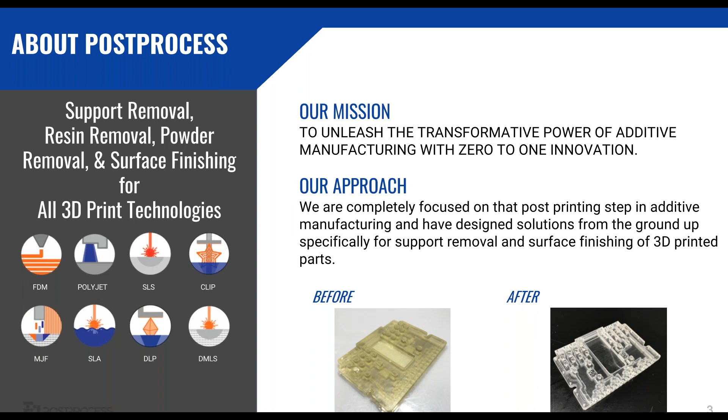So of course, when I talk about post-process, and that's our sole focus, kind of the next question I get with potential companies is, why is there a need for a company like post-process? Why is there a need for someone who's solely focused on that post-printing step? And the reason is, and I'm sure many of you are aware of this, and anyone who's been in the additive landscape for really any amount of time knows, when you look at the steps involved in printing, which is the design step, the build step, and the post-print step, the post-print step really has been one of the most neglected aspects of that equation.

So if you're looking at the design side with software like SolidWorks, then you go to the print side where you're printing with something from Stratasys like PolyJet or FDM. Those technologies are constantly being updated. You're constantly getting software updates. The printers are constantly being able to print new materials, print faster, those types of things. And then when you look at the post-print step, people are either using, or the printer companies are recommending, the same solution that they've been recommending literally for decades.

And more often than not, that solution wasn't designed for additive. It's something that's come from traditional manufacturing that kind of works at removing supports. So people have brought it over to additive. So it's not optimized to the process. And it's created one of the biggest issues of today, which is that bottleneck of the post-printing step, right?

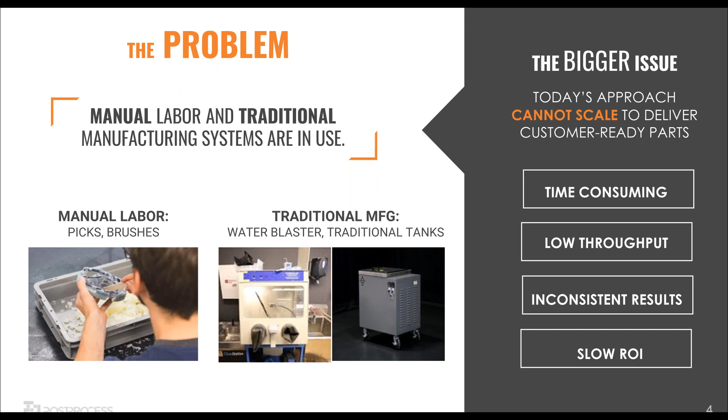I see that as no more true than with PolyJet itself. As you look at PolyJet support removal, there are really two methods that the printer companies recommend, and really only two methods that companies are using. The first, probably the most popular, is water jetting.

If any of you here are removing supports with PolyJet, you probably have one of these at your facility. But if you're not familiar with water jet, it wasn't designed to remove PolyJet support material. It comes directly over from traditional manufacturing for tool cleaning applications on metal tools. You have glove ports you stick your hands into. With one hand you're holding a nozzle like a pressure washer, and with the other you're holding the PolyJet part, just blowing support material off as best you can.

In fact, most models have a little windshield wiper on the front because water's getting sprayed up and splashing around, going back and forth so you can see and get in there. Really just not a great solution, right? But it's the solution that's been recommended ever since PolyJet has been around, and there's been really no advancement in that technology.

When you look at it, it's non-specific to additive, so you typically have a lot of challenges associated with it. Long, unpredictable cycle times. Every part tends to be a little different in the water jet. If it's small with no internal geometries, it might only take a minute or two to clean. But if it has any internal geometry, you're looking at maybe 20 minutes, maybe 2 hours. I've even seen a part that took 8 hours to clean because of the internal geometries. So very unpredictable.

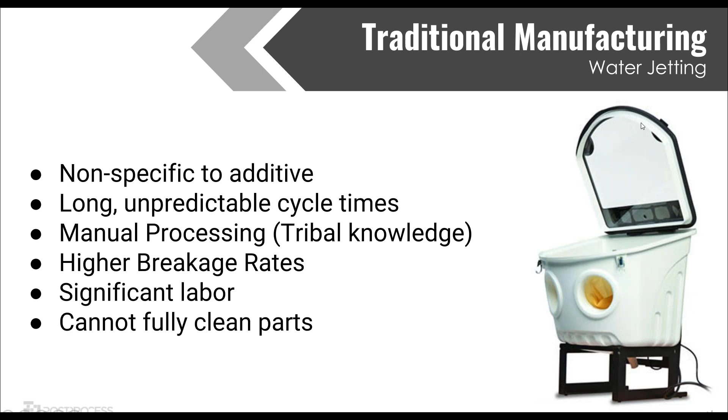I've heard it called a couple different things, maybe that hybrid layer—it's just that partially cured resin layer on the part that doesn't come off no matter how much you water jet it. It just seems to always be there. So that's what I traditionally see out of water jetting. The other method that's pretty common, and usually goes hand in hand, is just straight manual labor: picks, brushes, dental tools.

I usually see a mix of this and water jetting. I've run into some instances where, because of facilities requirements, they couldn't use a water jet, so they're doing everything by hand with dental tools and things of that nature. Very similar challenges as the water jet, but probably even more so - higher breakage rates, especially on thin wall parts, and inconsistent results, probably even more so with this method.

If you have 100 of the exact same PolyJet part and they all go through the exact same technician for cleaning by hand, you'll end up with 100 different parts by the end of the process. That's the nature of manual work - there's going to be support material left on one part that wasn't left on another. It's also very time consuming, probably even more so than water jetting, so a lot of time is tied up trying to clean these PolyJet parts.

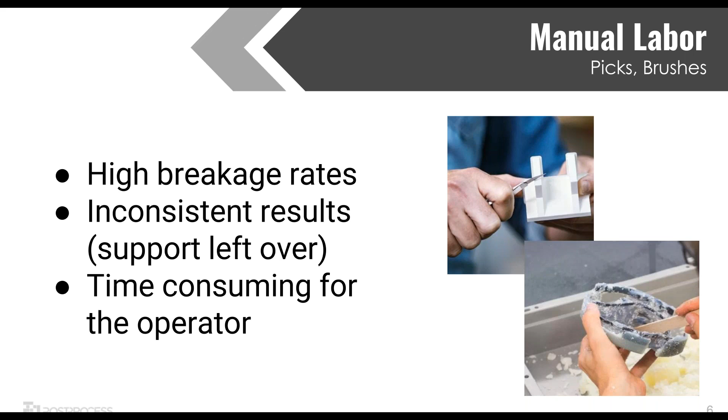These methods and challenges in the PolyJet support removal process are really what our founder at PostProcess saw and looked to address with our solutions. We've developed automated and intelligent solutions for PolyJet support removal, and to do that, our machines are made up of three core components: software, hardware, and chemistry. That's what makes us different from others - we're designing each section from the ground up specifically for additive manufacturing.

When I say hardware, here's a quick look at the support removal solutions PostProcess offers. There are a couple different technologies, whether it's a submersion system or a spray. Each of these machines can do any of the support removal processes shown in the top right - your FDM, SLA, PolyJet, CLIP, or DLP. Oftentimes it's a different detergent, but it's the same machine.

We'll talk about PolyJet today, and I'll specifically be talking about the submerged system, the DEMI and the FORTI. Those lend themselves really well to addressing those big PolyJet challenges we just discussed. The DECI and BASE also do PolyJet, but for the sake of today's timing, we'll just focus on the submerged system.

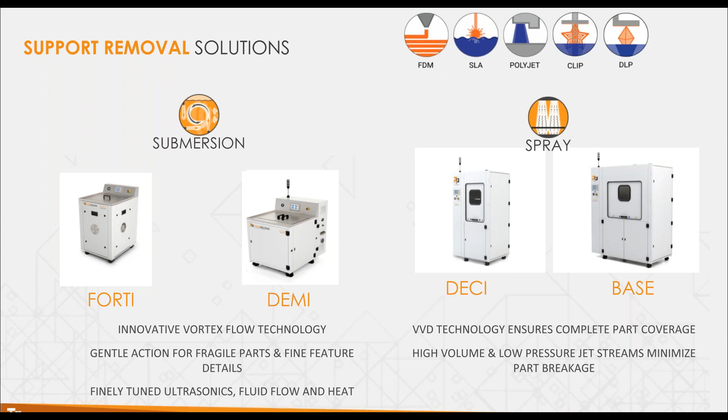Take a look at the FORTI and DEMI here - this is the hardware behind the solution. If you cut the DEMI and FORTI right in half, this is what you'd see: a tank filled with detergent, with strategically placed pumps that take your part and float it through the submerged tank. You've got ultrasonics on the right providing mechanical agitation to break up support, and also a heating and cooling system.

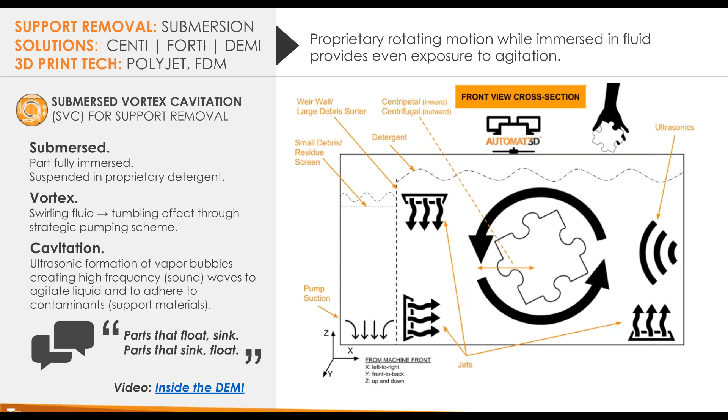This is conducive and designed specifically for additive. There are different methods here to take away the need for manual picking or manual water jetting - that's where the temperature, ultrasonics, and pump come in. Once you put the part in there, they're doing the manual work to remove those supports. That's the hardware aspect of the solution.

Next is the chemistry, the detergent - very different from what you see today. More often than not, customers looking at different chemistries to remove supports are looking at what already exists on the market and trying to see what works for additive parts. At PostProcess, our whole focus is 3D printing. We have in-house chemical engineers studying the support materials out there - the 705s, 706, 707s, and FDM soluble supports - and developing a detergent specifically to remove those supports. That's why we have special detergents for each print technology.

We have a detergent called PG1 that's specific to removing supports off 705, 706, 706B, and 707. This is what really helps optimize the solution - you have the hardware taking away manual labor with the ultrasonics, the heat, and the pump, so someone doesn't have to manually pick away at parts. Then the detergent is in there eating away at the support material like it was designed to, but not touching your part material.

That's one of the biggest reasons why when you pull a part out of our solution, it doesn't have that tacky hybrid layer you often feel when water jetting. When water jetting or picking, you're relying on manual force to remove support material, so there always seems to be some left behind. But when you combine mechanical force with chemistry like our PG1, that chemistry eats away at the support material so it's non-existent on the part - you're really just feeling the part material itself.

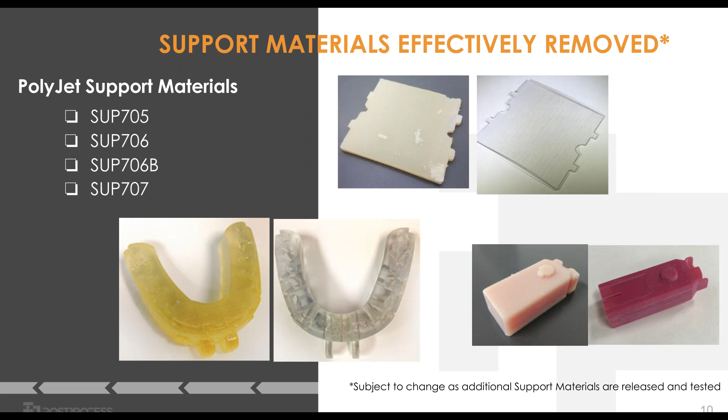And then the last thing I'll talk about for our solution is the software. So if you recall, we talked about the hardware, the chemistry, and now the software. The software is really what ties everything together. This is how we get our automated and intelligent solution.

When I say intelligent solution, the software really is taking care of a lot of the background changes and variables. So when an operator comes up, there's typically just 2 or 3 settings he hits to adjust, and then he hits play and he can walk away. You don't need that skilled technician, you don't need that guy with the tribal knowledge to run parts. With some just very basic training, you can come up and start a cycle within just a few seconds.

In addition to being easy to use with those 2 or 3 adjustments and variables, you also have the ability to save and store recipes. So now it could be someone's first day on the job and you just tell him to go run recipe part 506 or whatever you've named it. He can go up and with one click of the button, he's getting the same consistent support removal of the PolyJet part as the guy who's been there for 15 years running the equipment. It's all because the software has this control to save and store recipes.

And then the other big thing about the software is the control over the different variables of the hardware. So when I talked about the submerged system, the DEMI and the Forte, I said it had ultrasonics, a heating and cooling system, and a pump. The software really gives you some minute control over that. You can control the ultrasonics from 0 to 100%. You can control the heat to plus or minus a degree Fahrenheit. You can control the pump on and off. That is what allows you to process very thin wall parts without breakages and things like that.

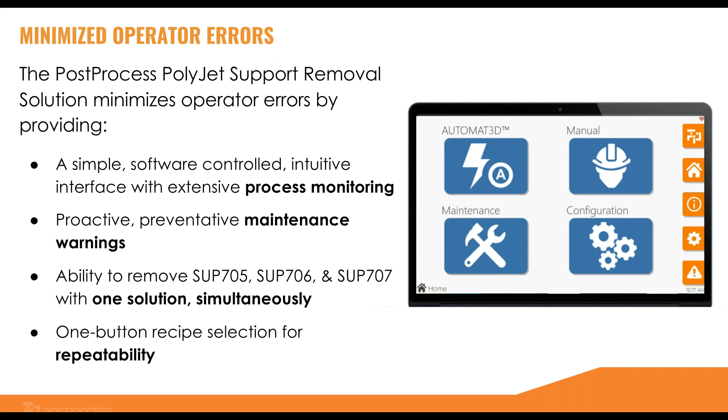So I just want to give you a couple more quick examples so you can see our solution works really well, whether you're doing 705 or 706 supports. You can see a couple of examples up there. Works well if you have internal or external geometries. Again, you're just using that chemistry to eat away at the support material, using that software to control the hardware. So if it's a real thin wall part, like the bottom right part you see there, you can dial things down so you're not going to get warping or damage. And at the same time, if you have a more robust part, like that one in the top left corner with a lot of support material on it, you can dial up temperature, dial up ultrasonics, and fully remove those supports.

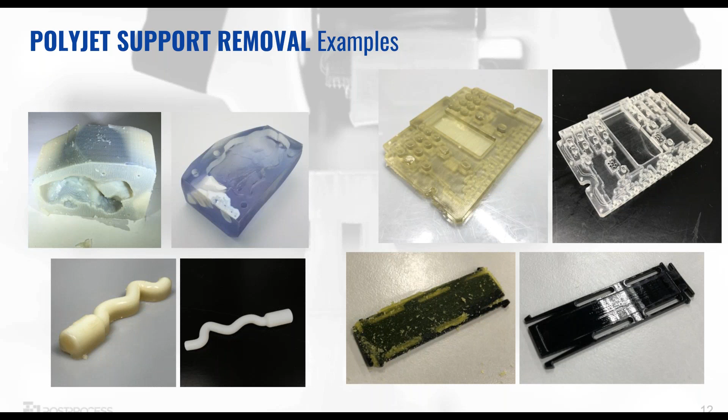And you're also getting a cleaner part by the end of it. When you're water jetting, when you're picking, you got that hybrid, that tacky, that waxy layer left over. Not the same when you go through post-process, because you have that detergent that's specifically eating away at the support material, but not at the part material.

The next one is advanced process control. That's just the software controlling the hardware and gives you the flexibility of running those fragile, unique, organic geometries without having breakages. But at the same time, you can dial things up like the ultrasonics and heat when you have a more robust part, and you can get quicker cycle times. And then, of course, minimize operator errors. It's just kind of the nature of automating the process.

Once you have saved and stored a recipe, you're doing the same exact sequence of events over and over again. So once it's dialed in, you're not damaging any parts. There's no need for operator error because he's not touching anything. But of course, if you're water jetting or picking, it's just a different action every single time on the part.

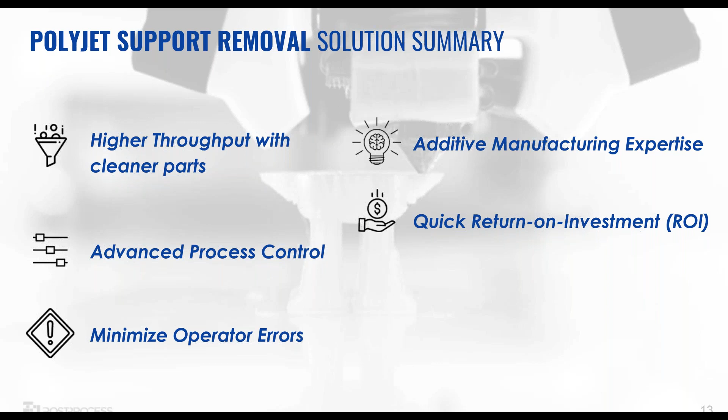So I'm going to go through a couple of real life case studies that we've done with post-process with some customers. Hopefully I kind of gave you an idea of some of the bigger challenges that people are seeing when they're water jetting and picking. I'm sure if you guys are using PolyJet, you're very familiar with those. And hopefully you got a better sense of what kind of automated intelligent solution this looks like from post-process. So these case studies are from real life customers that are switching from those traditional methods to post-process and how it's changed their lab.

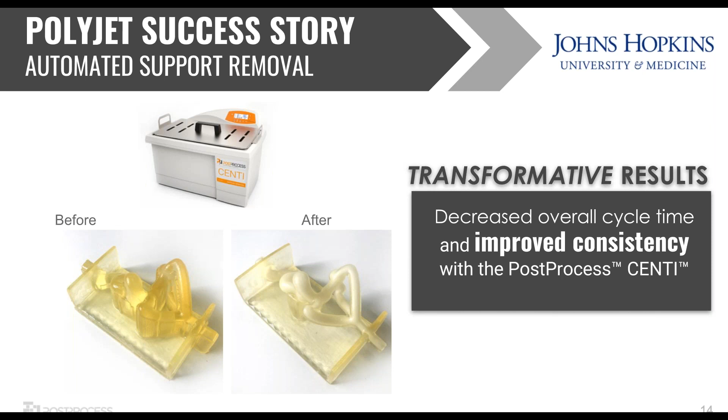From this, they got a hold of post-process. They switched over to our desktop system that you see there, the CENTI. Again, they're combining that hardware, the software, and really that chemistry to eat away at the PolyJet support material. In this case, because the channel was so narrow, we weren't able to fully get rid of all the labor, but we got it down to less than 30 minutes. So they went from about 8 hours of complete technician time down to about 30 minutes—we were really able to take out about 90% of that labor they were seeing using traditional ways to remove supports for PolyJet.

The next success story I wanted to show you guys is kind of on the other end of the spectrum. Johns Hopkins was only printing about 1 part per week, and it took like 8 hours to clean. This is probably a little bit more indicative of what I see companies doing today. This particular customer was printing about 50 plus PolyJet parts per day, and I will say every once in a while, probably like once a quarter, they'd get these bigger jobs where they had to do 100 to 200 parts a day.

With this specific company, they really had their dollars and cents down. They knew exactly how much they were paying for parts, and they had a really good working knowledge that every time someone touches one of these 50 plus parts a day, that cost per hour now has to get associated with the part they're cleaning and touching. So as they looked at traditional water jetting, doing about 50 parts a day, they averaged it out and saw that it was taking them about 8 minutes per part.

So they have a whole line of 50 parts. It's going through a water jet, and someone's standing there for 8 minutes cleaning each one. So they looked at how much they were paying their technicians an hour. They looked at how much consumables they were using, and they found that it was about $7.58 per part that they were creating.

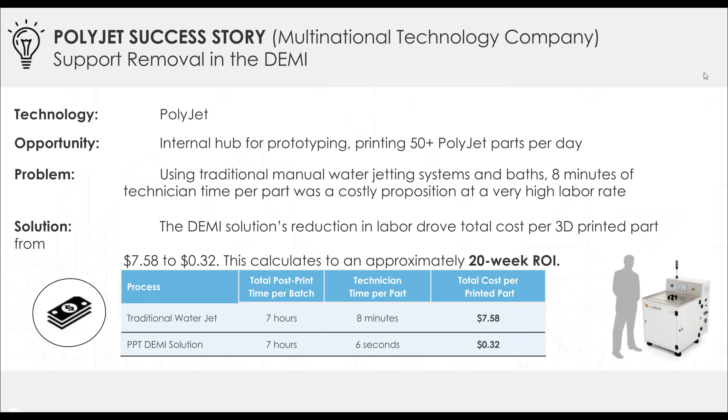So those were kind of two of the extreme examples, I think, for PolyJet. For sure, if you're printing 1 or 2 parts and it's super labor intensive, there's definitely a solution with PostProcess to help navigate and get most of that labor out of the cleaning process. And then on the other end of the spectrum, you may have a part that only takes you a minute, 2 minutes, or maybe 5 minutes to clean. But if you're printing a dozen or hundreds of those parts, that's hours and hours of extra labor cleaning. So having the ability to batch parts is going to be a huge benefit.

So for sure, there's a lot of different benefits for PolyJet. Like I mentioned, it's a cleaner part, things like that. But these are kind of the 3 higher level benefits that a lab will see from switching over to PostProcess. The first is consistency, right? If you're automating the process, you're doing the exact same cycle over and over again. You can have 100 PolyJet parts printed, go through our system, regardless of who's running the machine, and you're gonna get 100 of the same parts out at the end.

You're gonna have increased throughput because now it's not one person in front of one part, but you're actually batching dozens and hundreds of parts at once. And then finally, increased productivity. Your technician, your engineer, even you can hit play and then walk away. Go back to printing, go back to designing the parts, doing something more productive than just having to stand in front of a part and do some of these mindless tasks of removing supports.

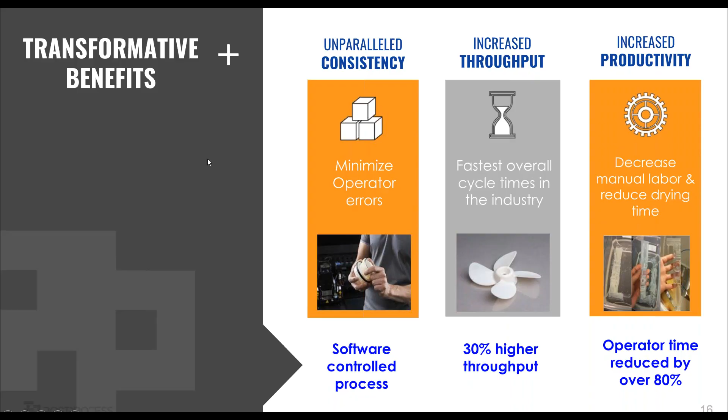So that's kind of everything I want to talk about with PolyJet. Hopefully that gives you guys a better idea of some of the bigger challenges. If you're printing in PolyJet, yes, you're not the only one. More often than not, people are using water jets and picks, and they have these challenges. That's why there's been such a shift and such a benefit to switching over to something like PostProcess, where you can automate and batch those cycles.